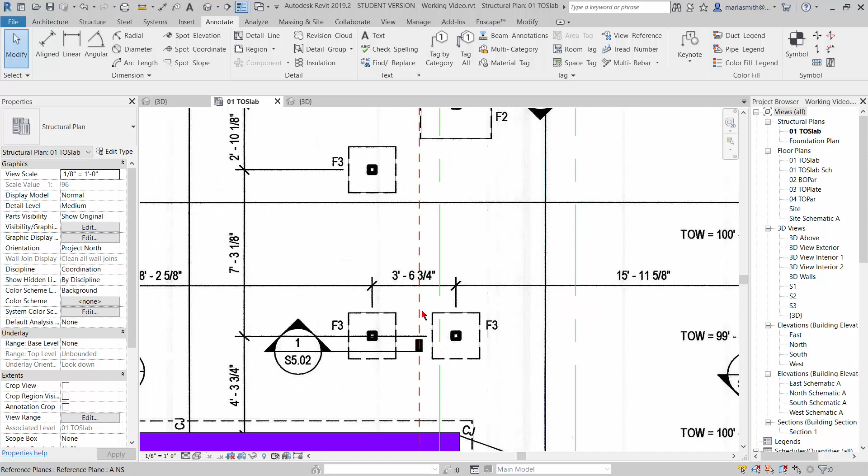Alright, so in the last video we went in and put these little slab thickeners underneath the slab here. Now we want to go and put the columns on top of those slabs, those little thickenings. So first thing we want to do is get the columns in.

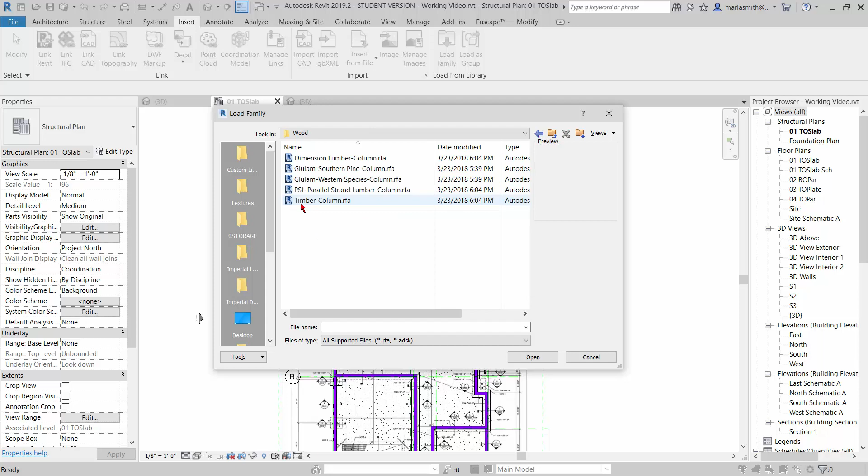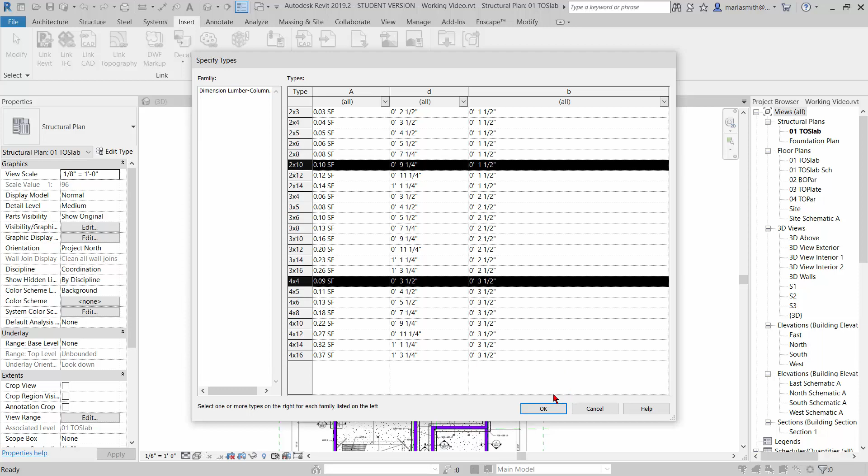I'm going to go to my Insert tab and Load Family, and we'll go down to the Structural Columns. We want wood columns, a 4x4 and a 2x10, so I'll get dimension lumber. In here you're going to see we have a 4x4 and there's also a 2x10. So I'll hold down the Control key to select both and click OK, and it will load those into my project.

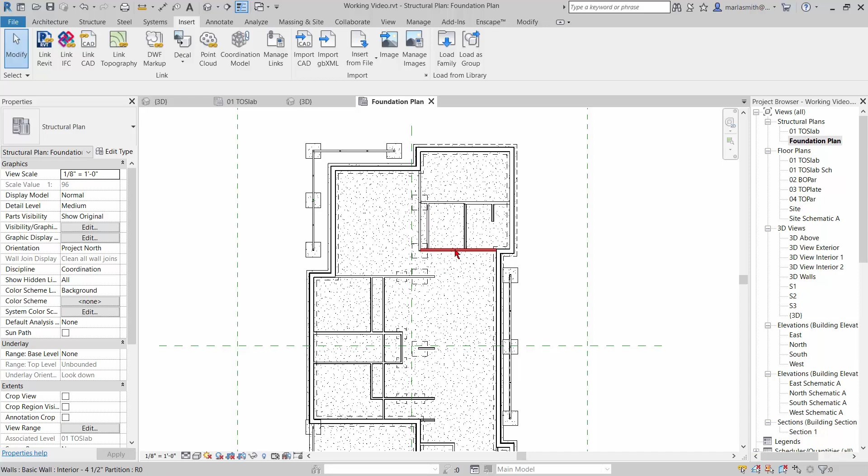Now we could place the columns here in this view, but it's a little busy. Let's go to our foundation plan, it's a little cleaner. Let's go ahead and use this - I'm just going to pick a wall and VH to get rid of the walls, so we just have these guys right here. We could also, if we wanted to, go to wireframe so you don't see them as solid.

And then we can go into architecture column - or you can go to structure and column - and we want the 4x4 that we put in. We want this thing to go high, right, and I would like this to go to the top of plate. So you should be able to see your column once that happens.

And we just want to come in and place this at the center. It's not going to pick the center, but just select near the center and then go to your Modify tab, and go to the Align command and align with the center of the foundation, the center of the column.

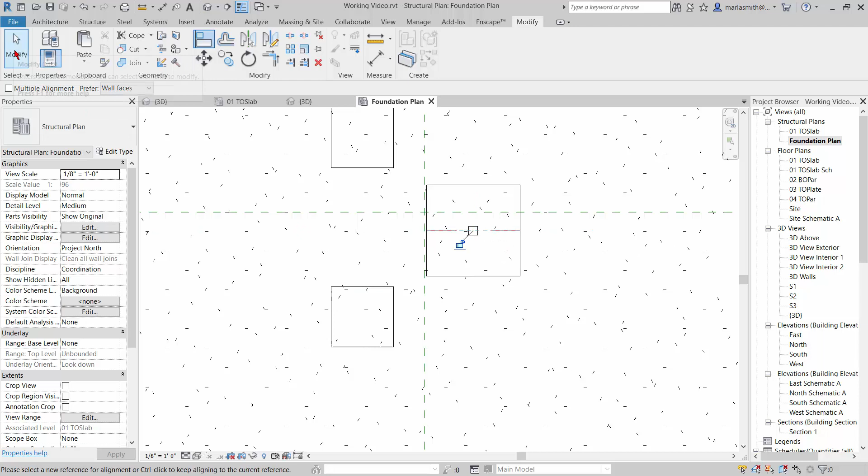Okay, and then you can go ahead and pick that guy and copy it to the other 36s, right, because that'll be in the center of those 36s. I should have used multiple copy, that would have been a lot quicker, right. But there's only 4 of them.

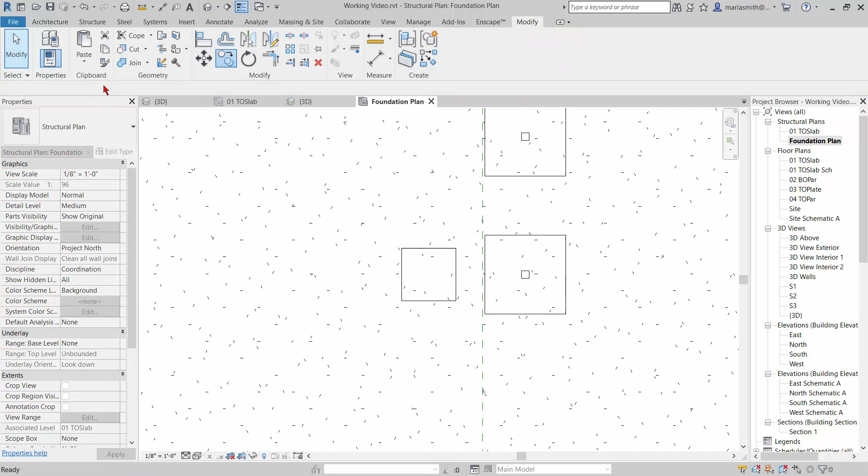And then I'll just go to copy and pick this guy because I know those are centered, and I can copy that from the center of that to the center of that. And then I'll just align, however you want to get it there - it doesn't matter, just get it centered.

And then I'll pick this guy, make sure pick copy and do multiple, and just pick the bottom right hand corner of that and copy it to all of my other areas that I need it. And then the next thing I'll do is place

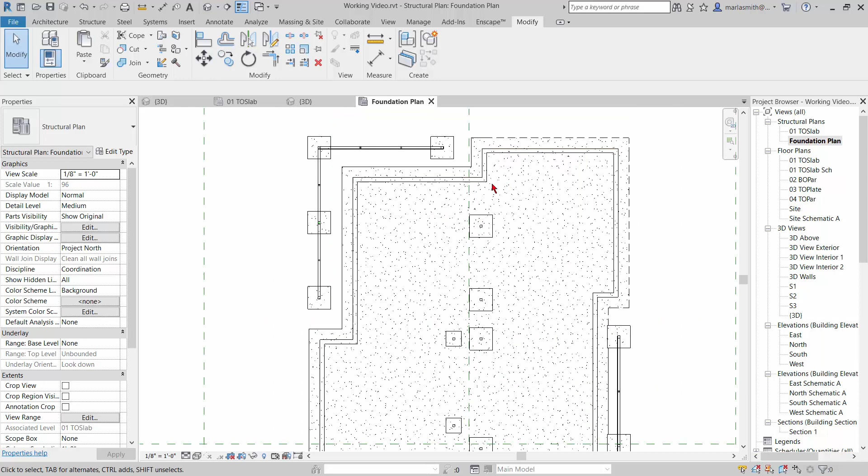the 2x10 in the wall here. I really do need to be able to see the wall to do that, so I'll do this in my top of slab floor plan. And you can see the columns showing up. Oop, that wall needs to go a little further.

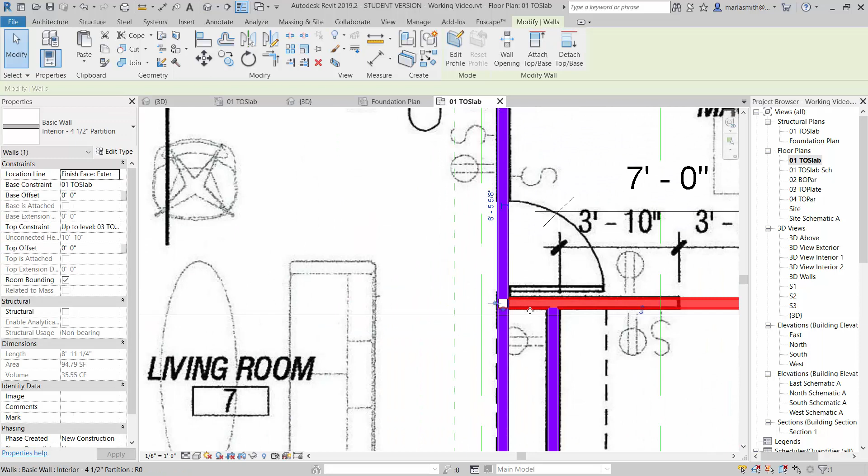And I want to place the 2x10 here embedded in the end of this wall. So I'm just going to go to my structure and column, flip it out for the 2x10, and that'll come in. I can hit the space bar to reorient it, and I'm just going to left click kind of close to where I need to be. Now I hope you can see this.

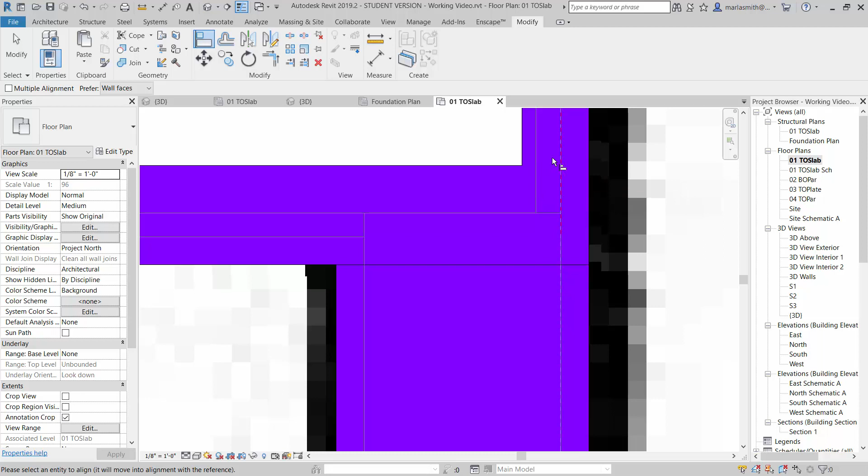There's a drywall right here, and then there's OSB right here. So I want this to go to just the inside of the drywall. I'm going to go to Modify and Align and tap my Tab key until I get the inside face of that drywall or the outside face of the OSB, depending on, and just move that guy into place like that.

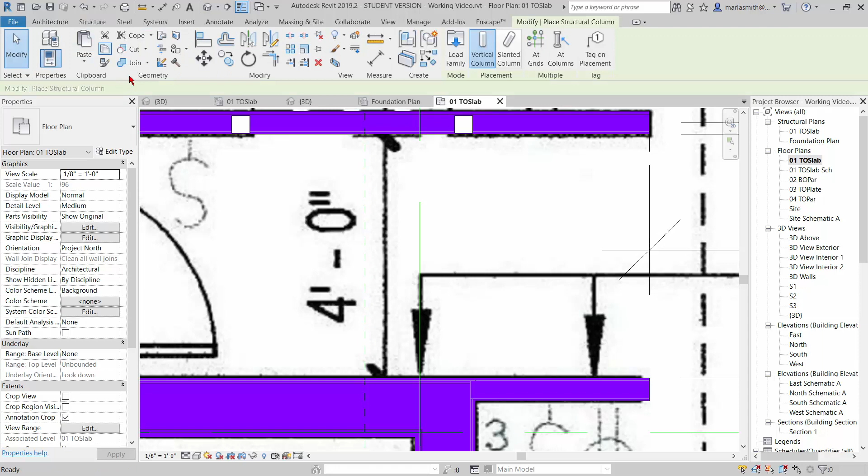So I'll do it again down here, right where it comes in and frames into this wall right here as well - this corner wall right here. So again, column, structure, column, hit the space bar to orient it and kind of place it close to where it needs to be. Align command,

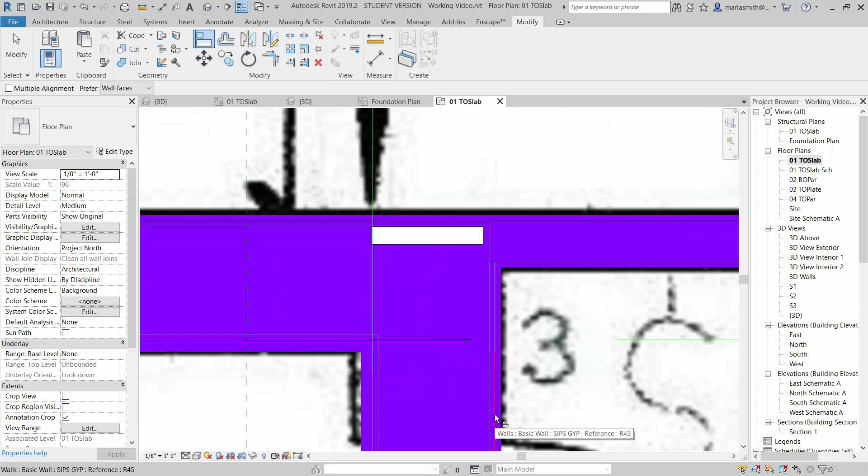exterior face - sometimes you may have to kind of move off to get the line that you need. So if I tab out here, I should be able to get that line and then move that into place, and then up here, that line, and move that into place. So they should be correctly situated.

So that's the columns. Let's take a look at it in 3D, see what we've got. You can see those columns, and they should be coinciding with the walls, and we'll double check that later. But the next thing we need to do is put the beams in. All right.